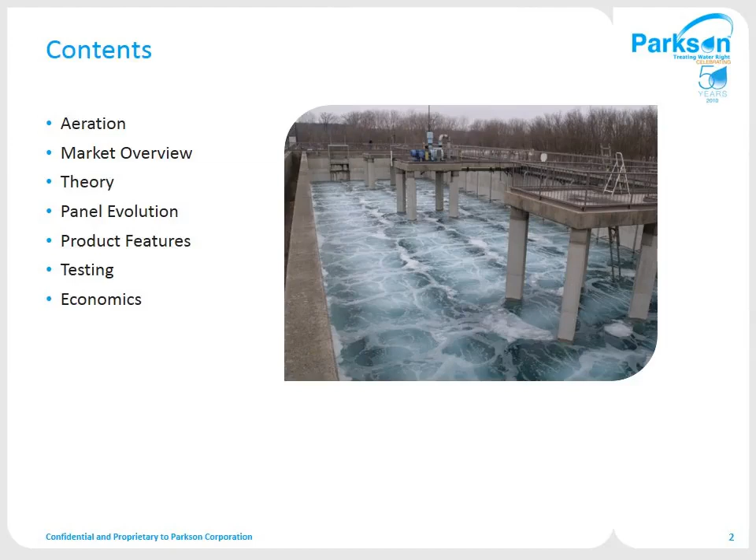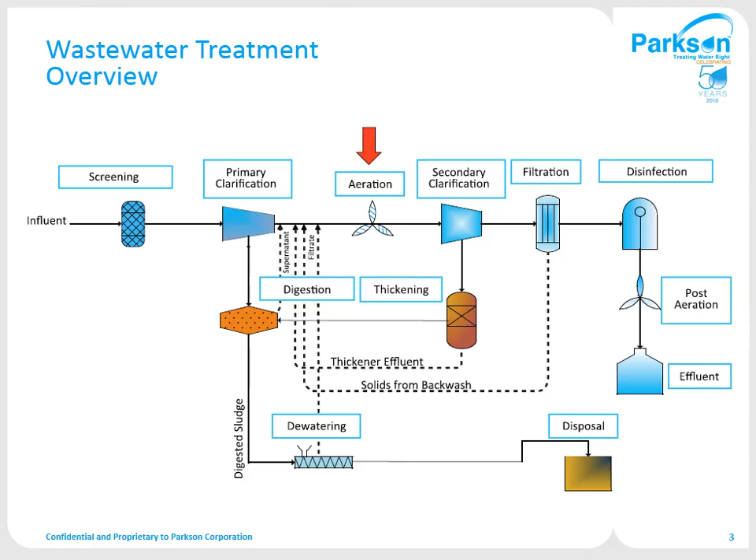Of the submerged technologies, sparger turbines are a bit of a cross between a surface aerator and diffused aeration, with efficiencies above surface aerators in a somewhat limited range. Static tubes are an older method of trying to create fine bubbles from coarse bubble diffusers. Jet aerators can approach fine bubble diffuser efficiencies in deeper basins and are mostly utilized in sequencing batch reactors or where wide variations in oxygen requirement and basin mixing requirements exist.

Fine bubble submerged diffused aeration is the most common type of aeration technology in use today, as it's proven, it's cost competitive, and provides efficient performance. The most efficient aeration systems today are the panel or strip type diffused aeration systems. These devices create smaller bubbles than standard fine bubble diffusers, spread them across a higher percentage of the basin area to produce the highest efficiencies available. Parkson's HiOx UltraFlex aeration panel was the first of these devices in the U.S. and is a leader in this type of aeration device.

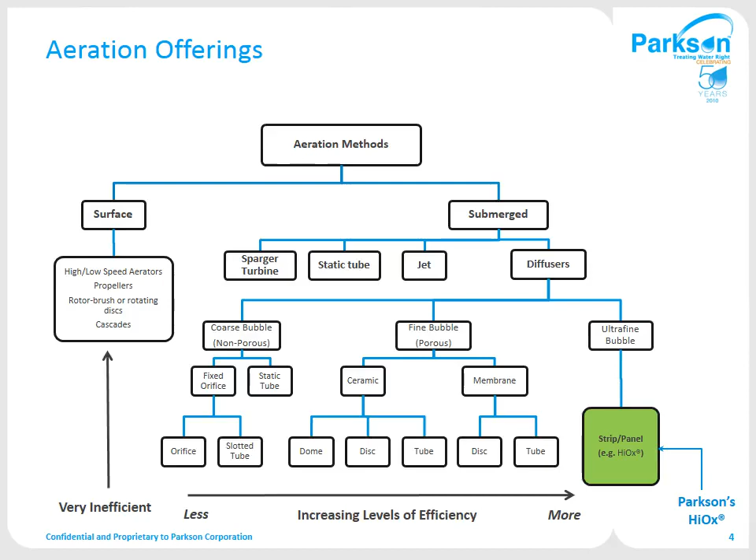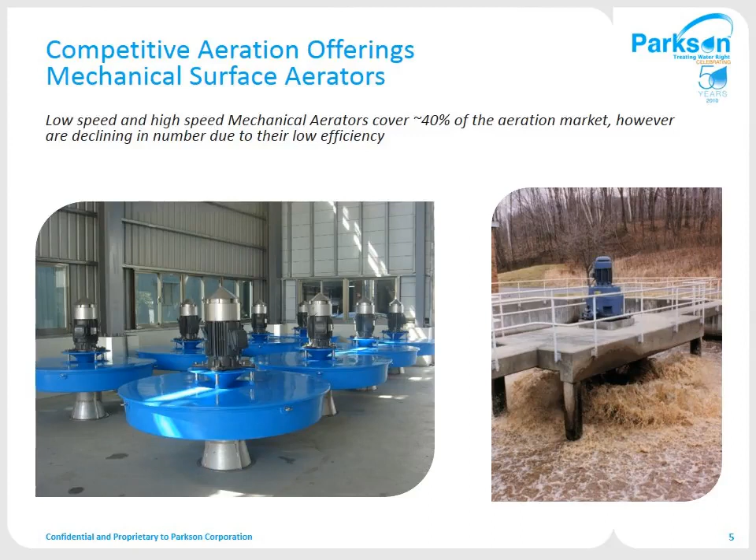Tube diffusers were one of the earliest fine bubble devices. Parkson licensed the first tube diffuser with a flexible membrane in the U.S. and developed it to lead the entire market into membrane aeration devices. Many other diffuser manufacturers followed us into this market.

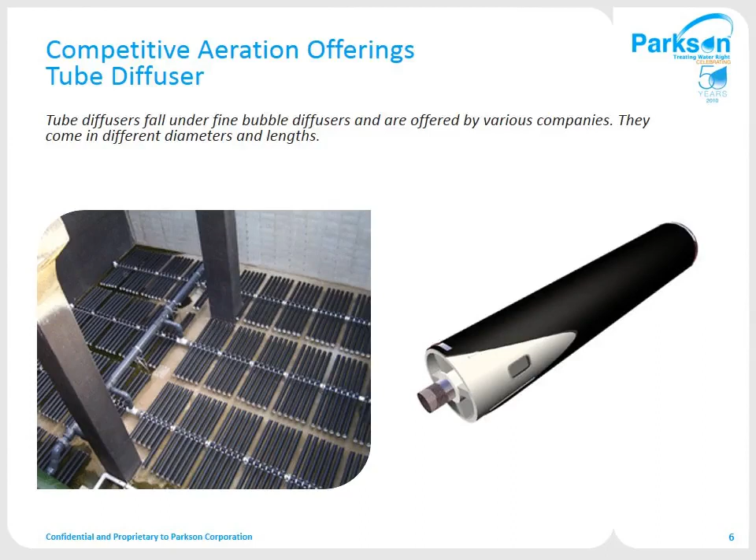Disc diffusers were initially introduced using porous ceramic materials. Biological fouling problems eventually led them to using membrane technology like the tubes. Disc-shaped diffusers can be manufactured and installed at very competitive prices, and they're typically the low-cost leaders of the diffused aeration industry.

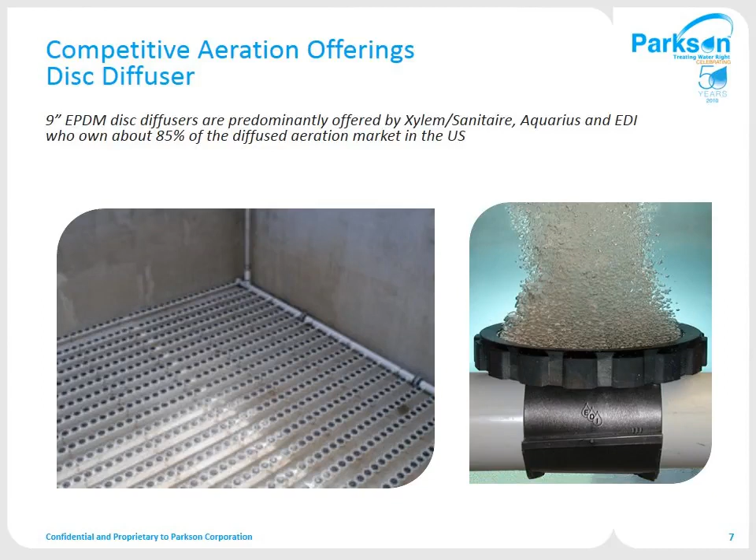The Ovivo or AeroStrip diffuser is very similar to the Parkson aeration panel and was developed by a former licensing partner. It uses a nearly identical membrane to the Parkson HiOx panel with a slightly different fixture geometry.

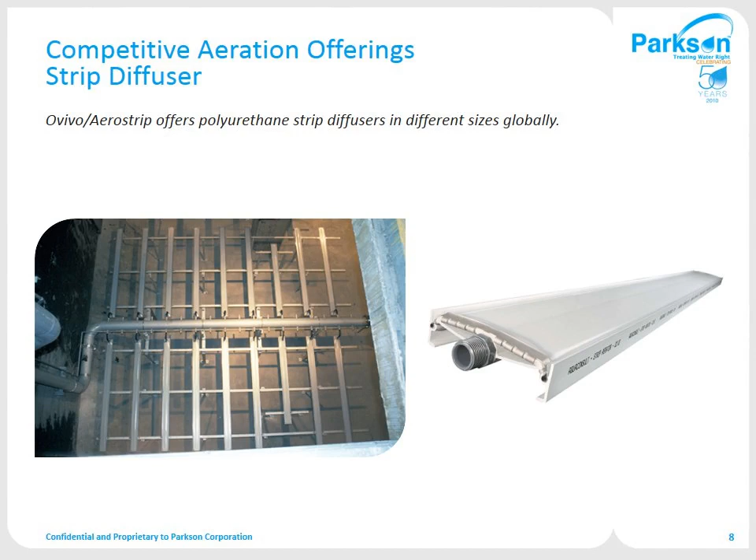There's individual control to each panel for complete control distribution and an easy isolation in the event that one's damaged in operation. The large aerating surface provides efficient, wide distribution of bubbles for maximum oxygen transfer efficiency.

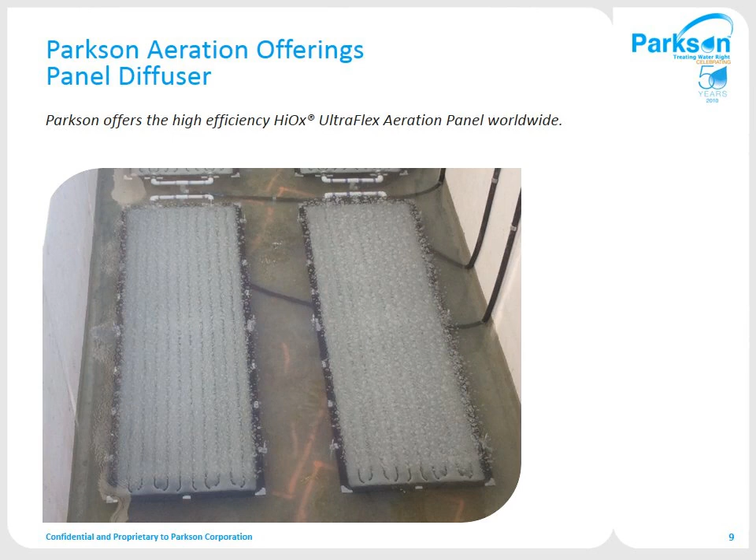Continued development will put the HiOx aeration panel into a position where a competitive purchase price together with low air supply horsepower usage will provide a product that's significantly less expensive to use over its lifetime.

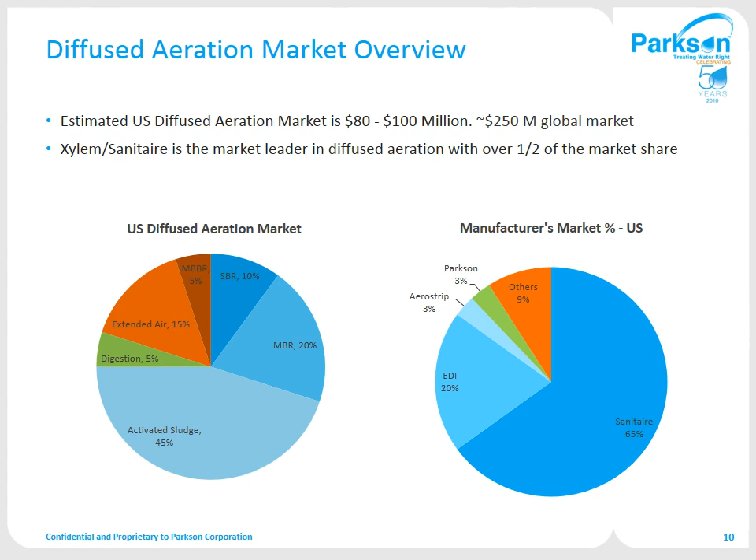Just a little background on the science of oxygen transfer into water. Our main objective is simply to transfer oxygen into the water. The oxygen doesn't treat the water, but basically supports bacteria that do the treatment of the water.

Since oxygen in a submerged bubble is transferred to the water through the surface of the bubble, and smaller bubbles have greater surface area for each cubic foot of air, we want to create the smallest bubble possible. Smaller bubbles also rise through the water at a slower rate, providing more time for the oxygen to transfer to the water.

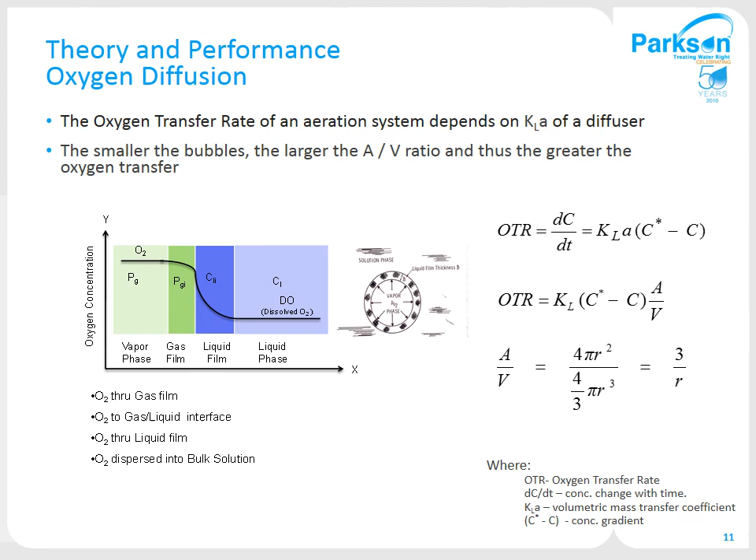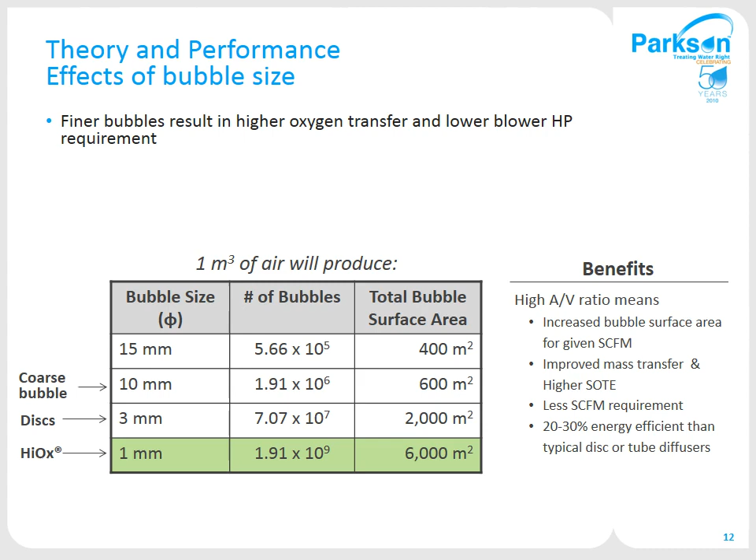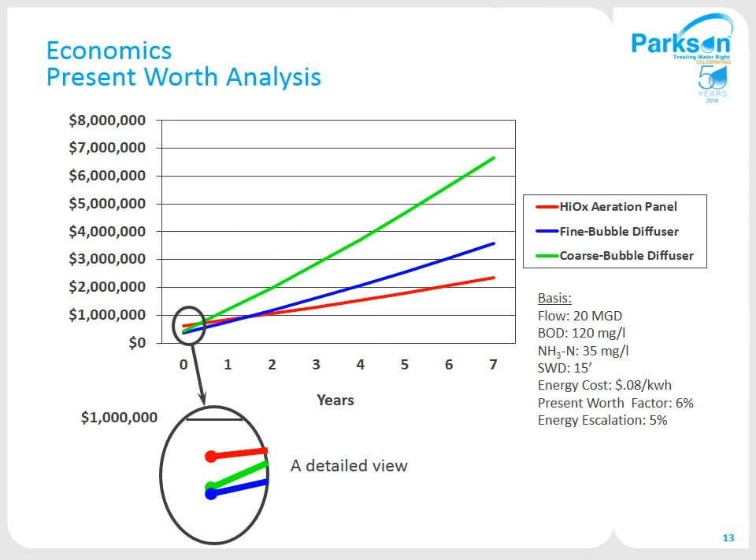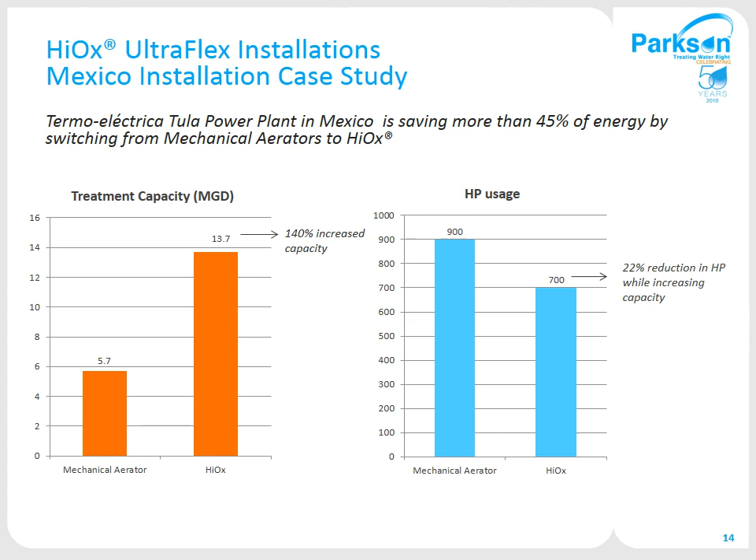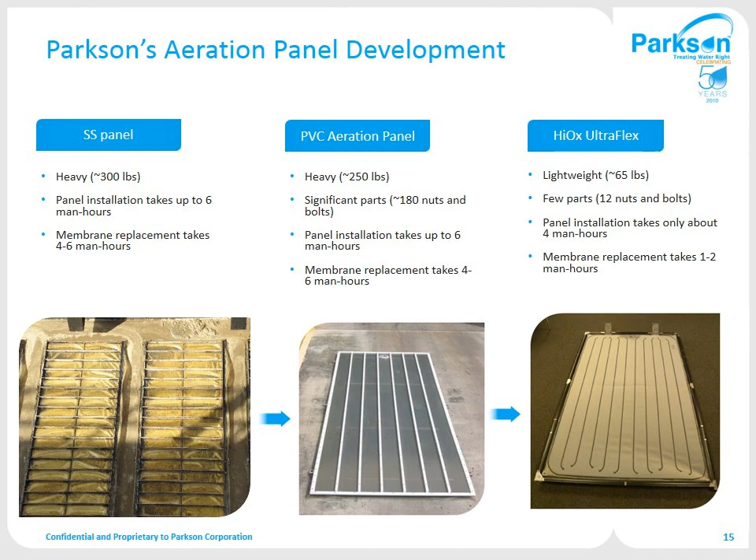As I mentioned earlier, we've progressed through several generations of improvements in the product over the past 25 years. Here you can see the results of these improvements that have significantly reduced the weight, complexity, and cost of the device. The designs on the left and center required more than 100 parts for assembly of a single panel, while the UltraFlex unit on the right uses less than 20 and is less than half the weight.

The HiOx UltraFlex panel features include a high-strength polyurethane membrane with over 25 years of experience, a nylon-reinforced 2-ply polyurethane base support or backing material, stainless steel frame construction, and a long useful life that's typically 10 years or more.

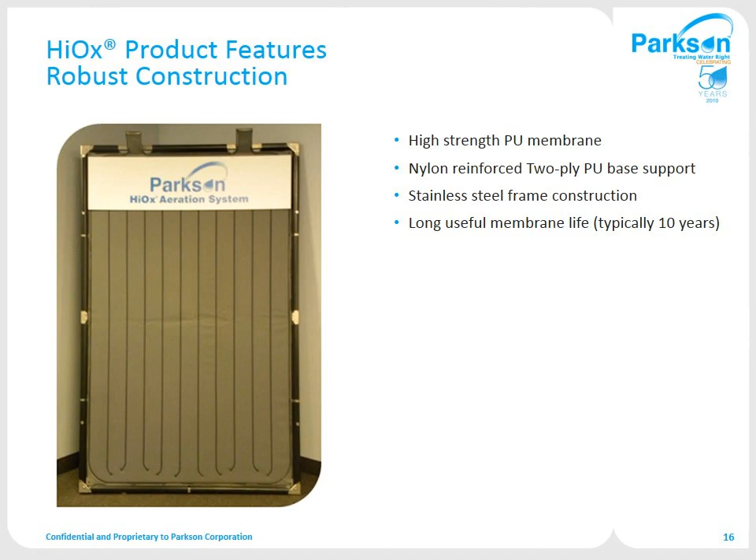The lightweight design makes the panel easy to maneuver in the basin during installation and maintenance. Membrane replacement takes only about 1 to 2 hours per panel from start to finish.

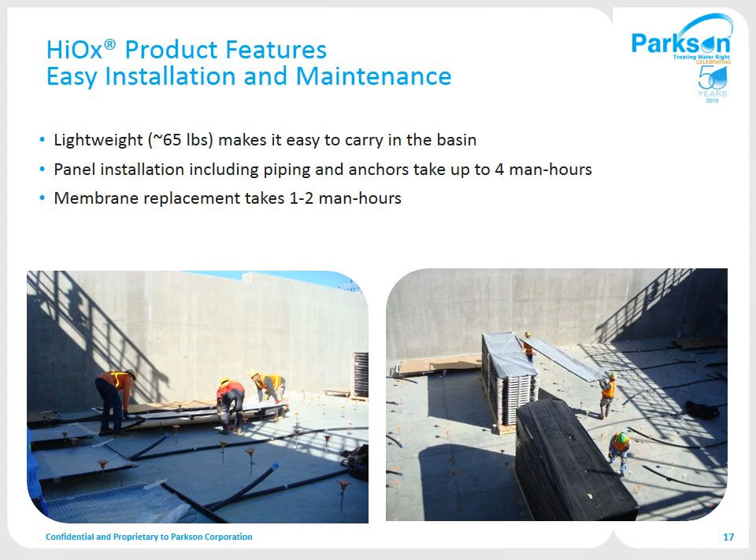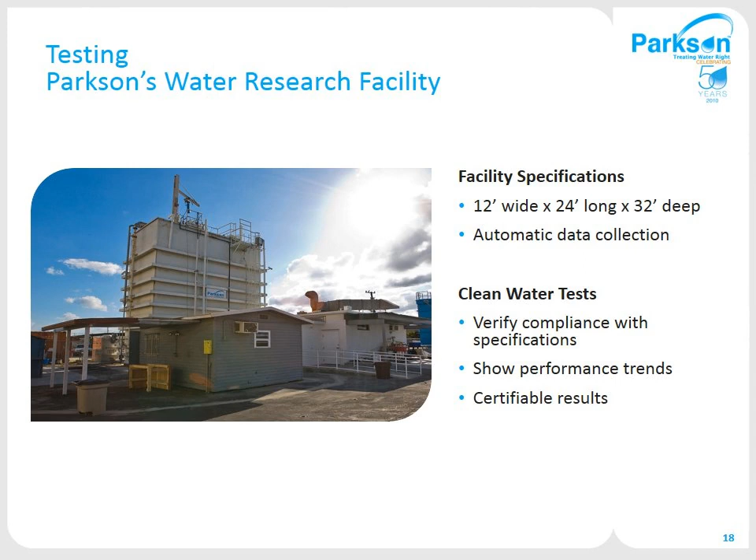For performance testing, we have the capabilities to test our systems at full-scale operating depth for development and performance compliance. Our facility includes a 32-foot deep tank, air supply blowers, automatic data recording, and limited lab capabilities. For quality assurance and production, we test every panel shipped to our customers for air distribution and pressure characteristics.

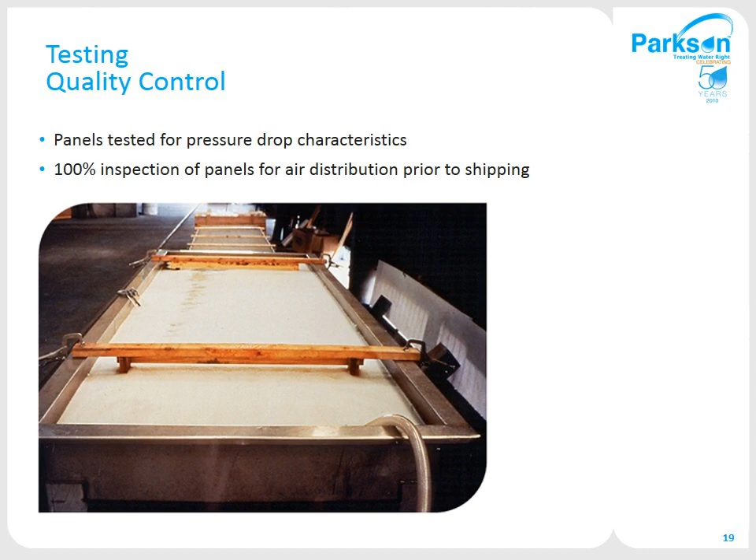The challenge to our customers is providing the sufficient transfer of oxygen to the aeration process while minimizing energy costs and capital equipment expenses. The solution available from Parkson Corporation is efficient aeration using the HiOx UltraFlex aeration panel.

Benefits are low cost, low energy cost, consistent performance over time, easy operation and maintenance, and long membrane life that's generally more than 10 years. It turns into a very green technology.